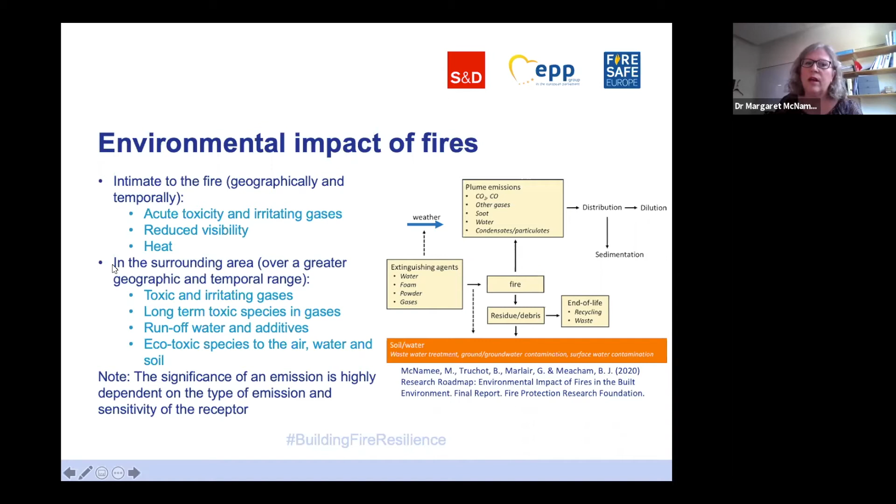But in order for us to understand how fires might impact on sustainability for green buildings, I think we need to start by understanding what we mean by green buildings. If we define a green building as one that, in its design, construction, or operation, reduces or eliminates negative impacts, then we also need to acknowledge that green buildings are not just buildings with green certification, but ones that try in some way to incorporate sustainability and holistic types of thinking.

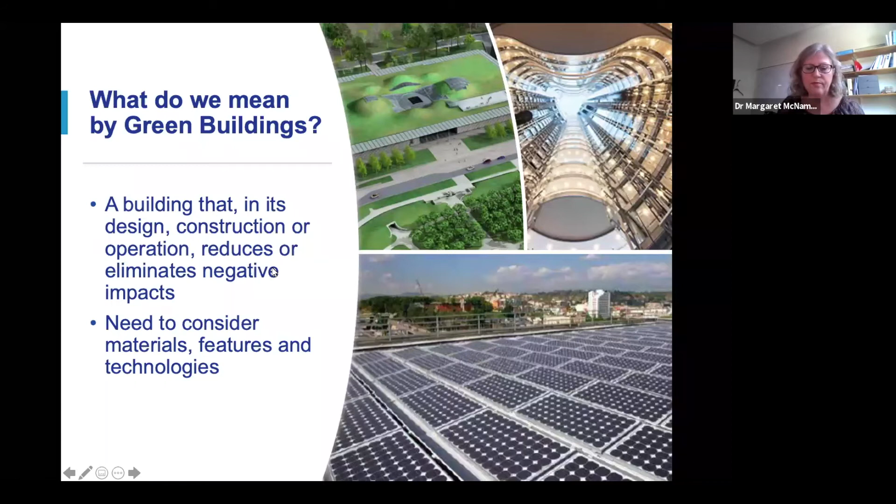So in that context, when we know what we're dealing with, a green building and green technologies, then we need to try and understand what are the fire safety challenges associated with green technologies and green buildings.

Recently, Brian Meacham and myself completed a study where we identified more than 100 different materials, systems, and features and grouped them into 9 different categories that are typical or could be associated with green buildings.

For each of those categories, we tried to identify the fire safety challenges that we either know about or we suspect may exist, but more knowledge is needed in order for us to be able to fully understand them. So when we went through these 100 different attributes associated with green buildings, whether or not they are a fully green building or a green technology within, say, a renovated structure, we were able to identify these particular challenges.

To begin with, there is the potential for competing objectives when we're working with sustainability and fire safety.

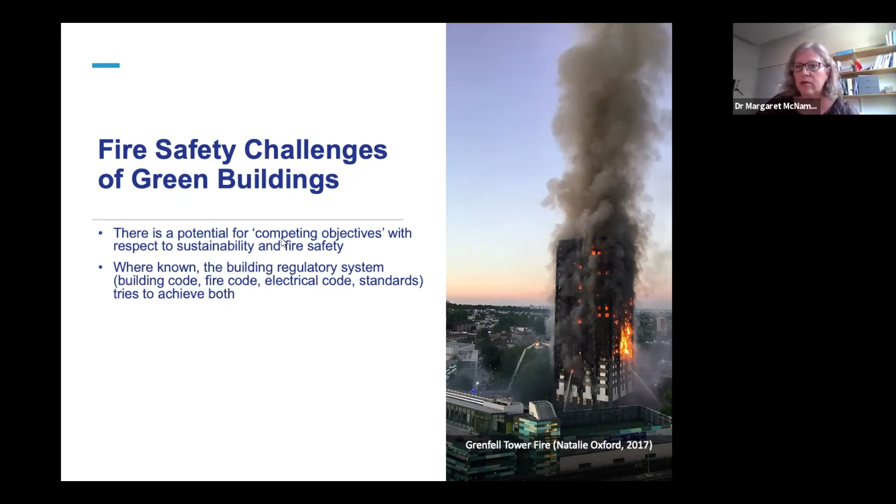While the big building regulatory system—building codes, fire codes, electrical codes and standards and so on—does try and consider both sustainability and fire safety in some cases, they are not always able to do so very well.

So there is a potential for fire hazards and risks that can result due to the introduction of new materials, systems and features for which the fire performance may not be well understood, especially in the case of complex systems.

And the picture that you see on this slide is the Grenfell Tower fire, which was mentioned by MEP Fajon as part of the introduction, and is one example where we do have a complex system which was being used and did not perform well in the case of exposure to a fire.

Unfortunately, we're also seeing that some extra regulatory mechanisms, for example rating schemes, may actually inadvertently introduce unintended fire risks or hazards due to the fact that they're expecting regulatory systems to pick up the safety slack, but they're often too slow to be able to do so well.

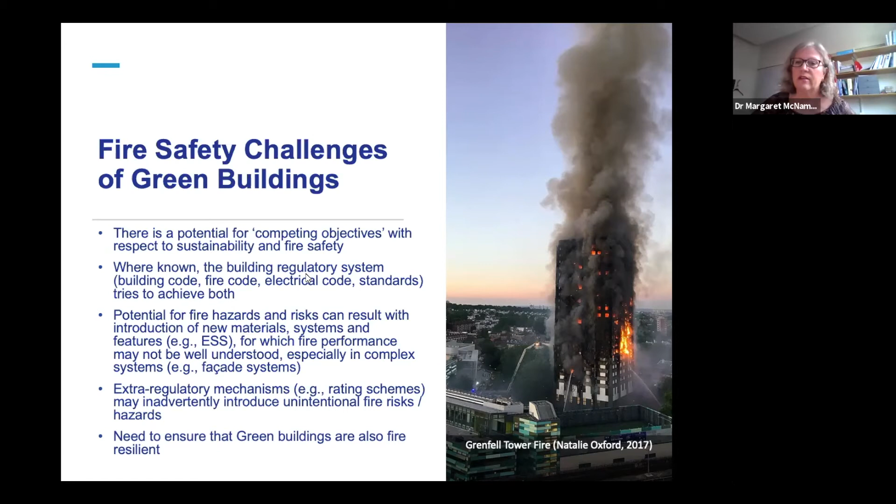Therefore, there is a need for us to ensure that green buildings are also fire resilient as a part of creating a fire safe and sustainable building.

So in terms of the fire resilience of buildings, that means essentially the ability to prepare for, absorb, recover from, and more successfully adapt to fire events.

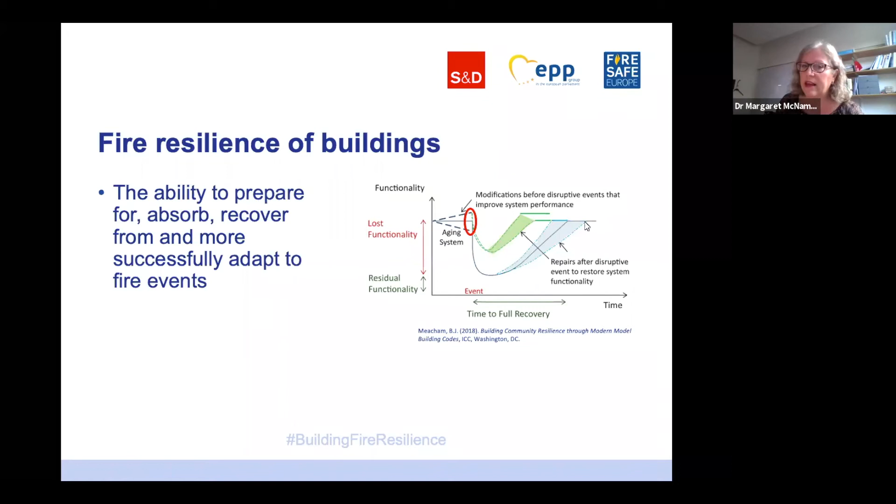If the building is resilient, then it could hopefully rapidly be able to recover and come back to a high level of functionality. But if it is not resilient, then you would expect either an entire loss of functionality, for example in the case of a building burning down, or it taking a considerable amount of time for that resiliency or functionality to be recovered.

So I would say that there is a need for both sustainable and fire resilient buildings. Buildings should be sustainable and fire resilient, and a building that burns down is actually neither sustainable nor fire resilient. So we need to include both our understanding of sustainability and our understanding of resiliency in order to be able to create truly fire safe and resilient buildings.

So finally, sustainability and resiliency are different, but they are equally important concepts, and they should both be considered in building design. In some cases, we see that there can be a potential for competing objectives, but these do need to be managed. We can't just from a sustainability point of view say that the regulators need to be dealing with the safety issues, and from the safety point of view say that extra regulatory activities need to be dealing with sustainability.

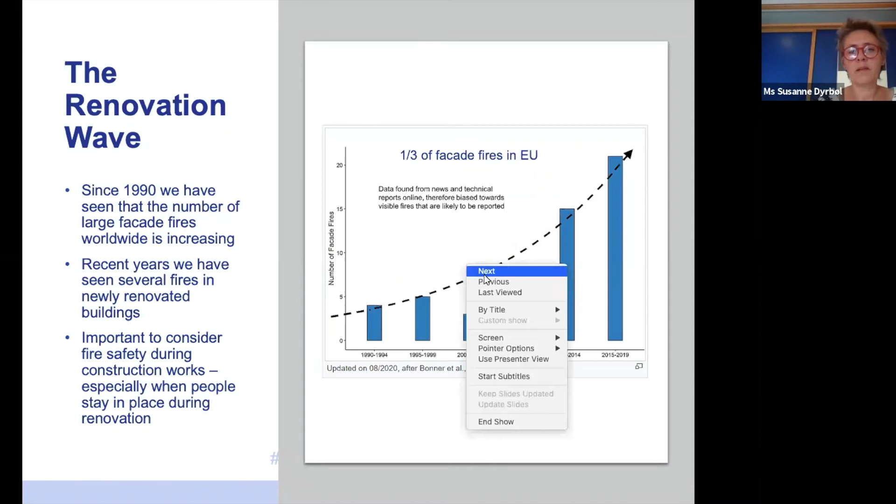So a final or nearly final remark. I think it's very pleasant to see that the European Parliament, in their own-initiative report on the energy efficiency potential in the EU's building stock, also acknowledged the importance of addressing fire safety together with energy efficient renovation. We need to make sure to use the renovation wave as an opportunity for Europe to support both deep renovation and fire safe renovation in one go.

So despite fire safety might seem like a minor issue compared to climate change, poor air quality, high energy cost and energy poverty, we need to get it right if we want to make a success of the green transition and the renovation wave.

Fire Safe Europe has come up with four recommendations for the renovation wave. First, we need to make sure that financial incentives account for both energy efficiency and fire safety at the same time. We need to take special care for fire safety and fire resilience when renovating the worst performing buildings. We also need to encourage use of sustainable and fire resilient building materials when renovating. And finally, we need to carefully assess fire risk of new technologies and materials.

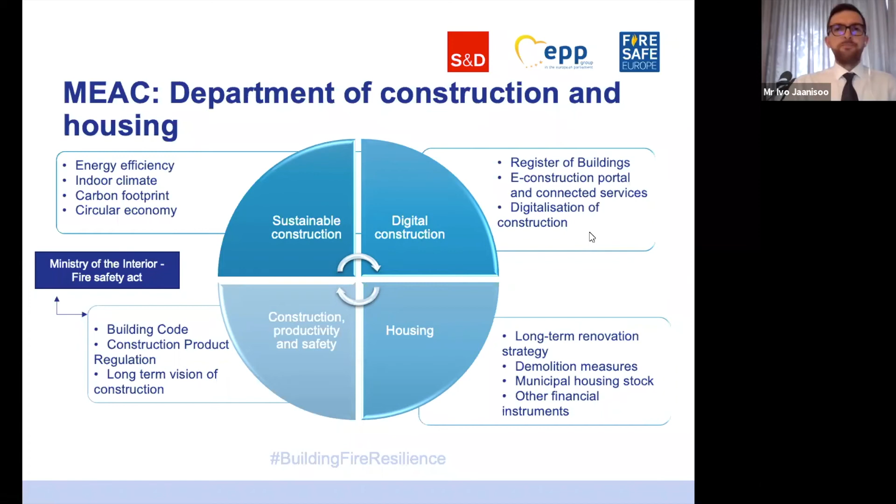A little bit about energy performance of buildings. Energy efficiency of buildings in Estonia is a quite recent topic. Therefore, we don't have too much legacy of old requirements. First time it came into Estonian regulation was 2008. So a little bit more than 10 years we're dealing with this. So we managed to start with a very fresh and new and efficient take on energy efficiency.

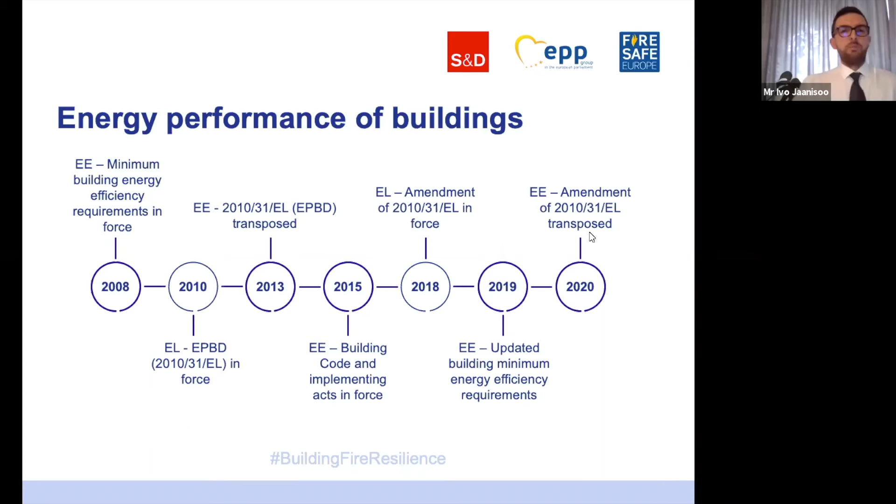Of course, we're transposing all the directives, but we're trying to do it in a smart way so that we wouldn't block ourselves unnecessarily. One example here is the EPC, the Energy Performance Certificate system that we have in Estonia. The core of energy efficiency verification and control is the energy performance value, and this is the most important thing. How you achieve it, which kind of U values you use in a wall or roof or windows or whatnot.

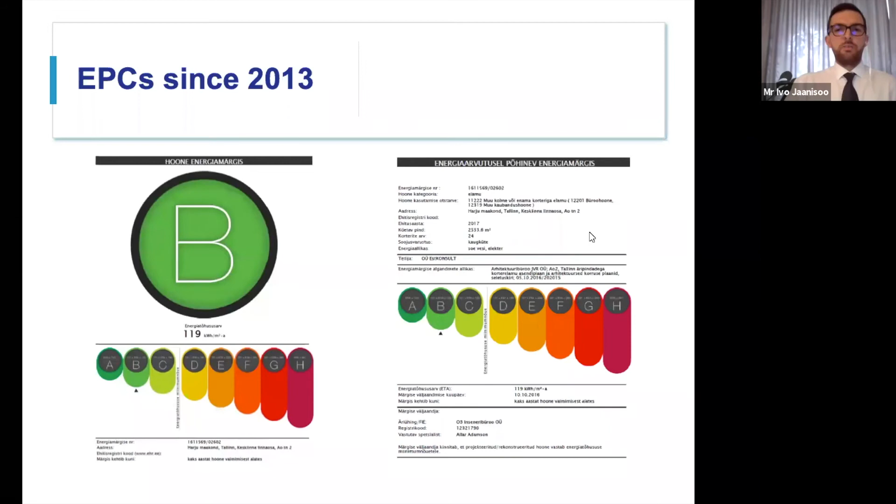This is up to the architects, up to the engineers to figure out based on each building. So this is a completely performance-based regulation. It works very well, we are improving it all the time. But I would really like to stress this importance of performance-based design instead of prescriptive design, to spur innovation.

So to now put things together, the EPC control and fire safety control, we have to look a little bit at how the building permit procedure works, or state supervision and control in general. The EPCs are checked at the building permit procedure level. So when building permit application is handed in, then the EPC is included in that, and the authorities will look into that.

And the EPC will be looked at again when there are major changes in the design documentation during the use and occupation permit procedure. When building is ready, then the EPC information will be provided at transactions, exactly as this is also written in the EPBD. Fire safety is more of a holistic thing. Rescue board is always being consulted with. They have to validate the design documents, and they are also making the state supervision of fire safety.

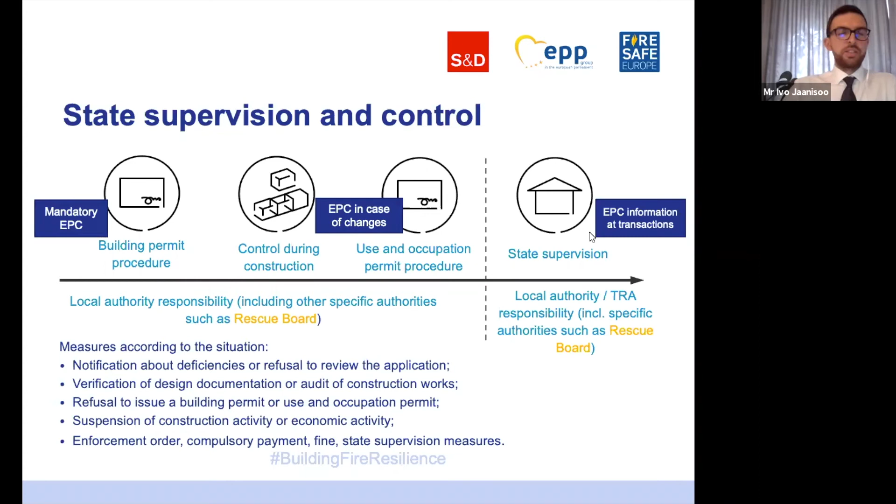And of course, there are many measures according to the situation how to make sure that the buildings are fire safe. But a little bit about the procedures itself, how it works technically.

It's completely digital, already 4 years now. The application is handed into the register of buildings. This will be then on the table of local municipalities, and local municipalities then discuss with specific government organizations such as Rescue Board, who is responsible for fire safety, and then the fire performances of buildings will be verified, and the building permits and use permits will be given out.

And this digital communication is also improved currently in Estonia. One example how we improve this is by BIM-based compliance checks. We have made a proof of concept already. It includes also some fire performance controls. One of them is evacuation route length, for instance.

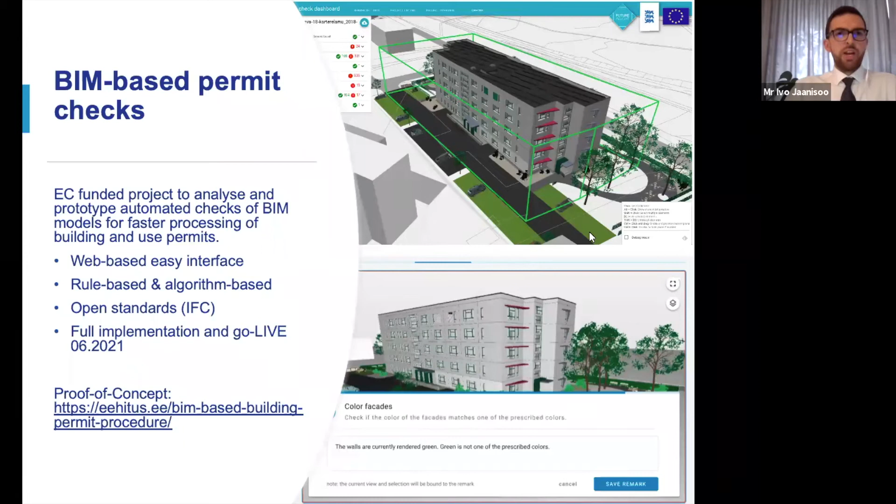By next year, we will go live with a full version of BIM-based compliance checks, which includes, among others, the checks of building area, height, designed user amount, fire safety class, fire partitions, REI values, and so on.

Even if we have these prescriptive regulations in our fire norms, we have to make sure that the authorities will not, let's say, confuse themselves with very simple checks. The very simple checks can be made by computer, and here we're tapping into the possibilities of artificial intelligence.

Here on the right side, on the photo, you see the red and green areas. The red areas is where there's not enough distance to the evacuation route. Therefore, this BIM model has to be changed somehow to get enough short distance to the evacuation routes.

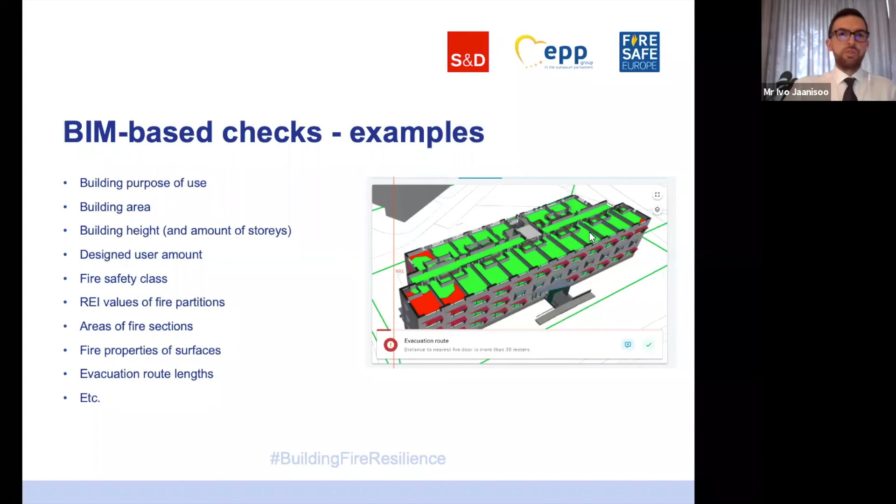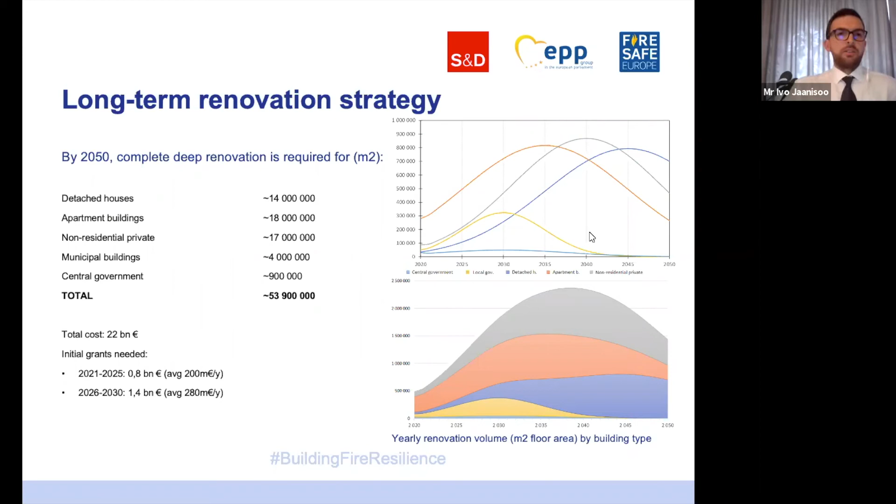A little bit about long-term renovation strategy as well. The volumes should be increasing 5-fold from today to the next 20 years. This is a huge challenge, but there are, of course, certain possibilities to do that, financial possibilities and also know-how.

What I would really like to stress here is the regional aspect, that in very many areas of declining population, there is not enough new apartment buildings or renovated apartment buildings coming to the market. And that means that the quality of dwellings is decreasing year by year. And this is not only an energy efficiency problem, it's also a safety problem, certainly a fire safety problem.

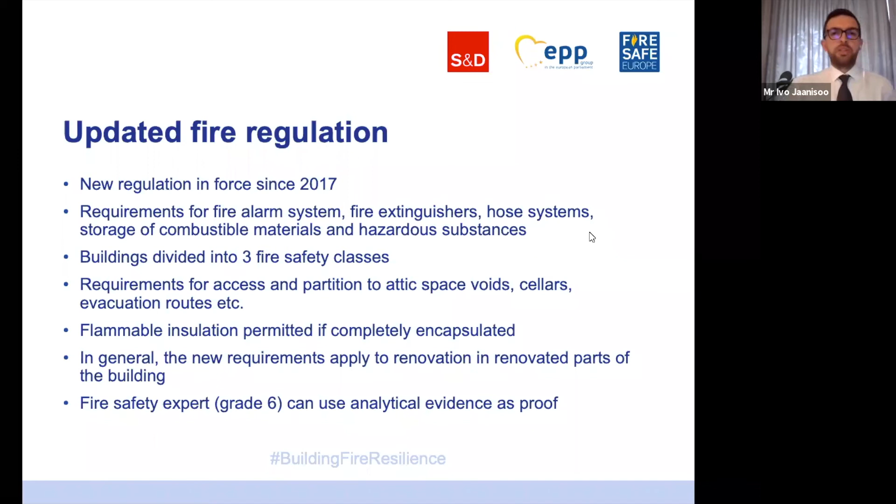I will go over this updated fire regulation. What I want to stress here is that in 2017, we introduced a more specific regulation for providing analytical evidence as proof of fire safety. And this is also a little bit similar to this energy performance value aspect, that it's completely performance-based regulation. So if you cannot verify fire performance of a building within the regulation, then a competent engineer can use analytical evidence to prove that. Of course, yes, in renovation, there are certain safety challenges.

What I want to point out in Estonia is the problem with gas heating appliances. They're often burnt out, broken, leaking. There is poor air circulation, not enough CO sensors in the dwellings. When we provide grants, loan guarantees to buildings for renovation, then it's also a condition that these gas heating appliances have to be replaced with new heating systems.

We believe in deep renovation at a very deep level, so to speak. We have to make sure that the indoor quality is good, that not only the building envelope, but also a central ventilation system must be installed, so that there wouldn't be a plastic bag effect.

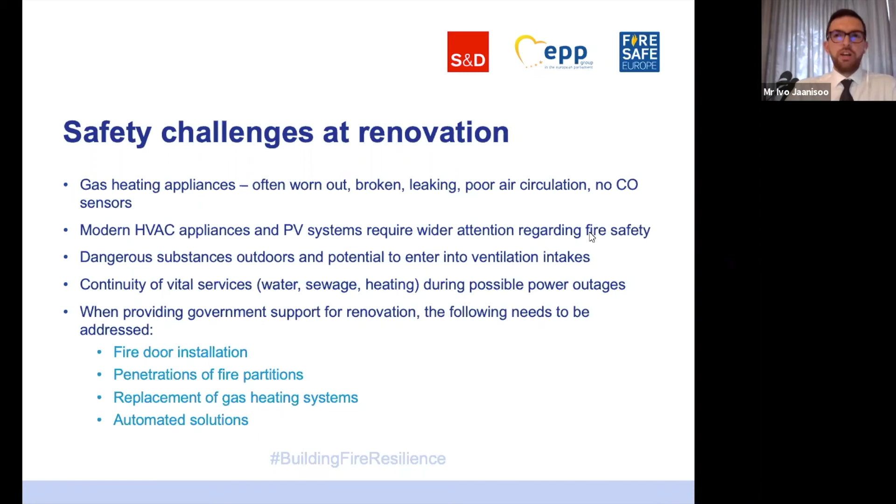And of course, there are other fire issues that can be remedied through renovation, and this is what in Estonia we promote via our grants and other support systems. So let's innovate and automate. I think these coming challenges need innovative thinking.